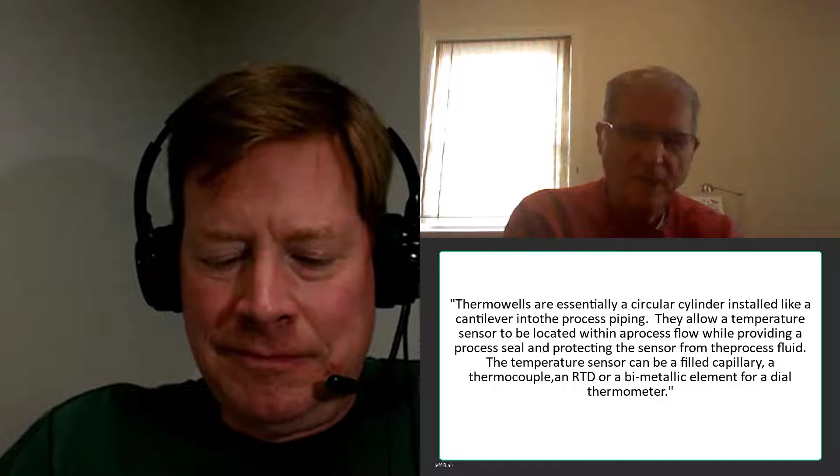So that's kind of where we are. I was able to get a wide breadth of experience in my professional career - I've seen everything from heavy chemicals all the way up to pharmaceuticals, silicon, textiles, the whole bit. In '96, I got a master's degree at Washington University - it took me 5 years of evenings - and that kind of allowed me to get the teaching position and a few things like that. So that's pretty much my professional career. I managed to get elected to ISA Fellow about 10 years ago or so. So that's pretty much where I am.

So you've got some pretty heavy credentials, I'd say, going throughout. I used to travel North America and Canada, and there's quite a few engineers out there that I think you trained, either mentoring at Monsanto or teaching at WashU. Oh, that's interesting - I didn't realize there's a lot of Heider disciples out there.

It's amazing what happens. Well, today we're going to talk about one of the subjects that Bob has tried to impart some of his knowledge and teach me. So, from a simple standpoint, this little piece of metal is what we're going to talk about - they're not always made of metal, but this is a stainless steel thermowell. Normally you'd put an RTD or a thermocouple in here, and then this would insert into the process. This happens to be a threaded thermowell. So Bob, can you tell us a little bit about thermowells and maybe what happens when you don't use them, or thermowells gone bad, I guess you could say?

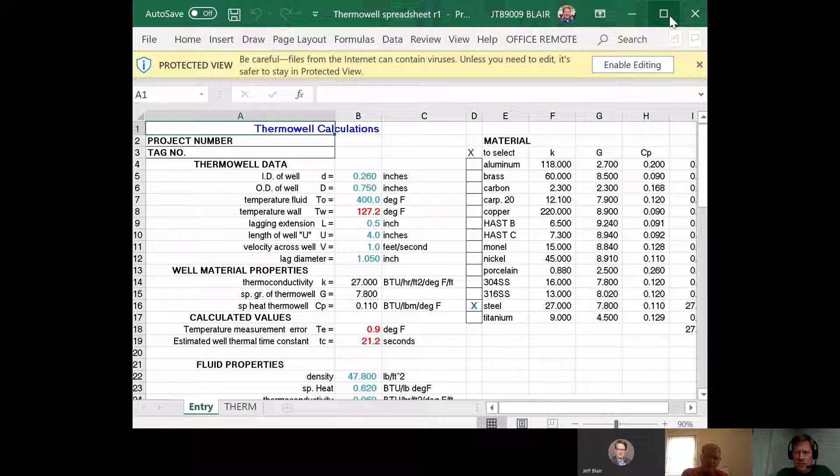Well, one of the interesting aspects of these is the fact that there is an error - there can be an error. In some cases it's very small, but in other cases it can be very severe, depending on how it's installed. And that's because you actually have heat conducting in one direction or the other, depending on whether the process is hotter or colder than the ambient. If you think about your days in high school chemistry, and you had a beaker and you needed to know what the temperature was, you always found that if you stirred it around, you would get a more rapid indication of what the temperature is.

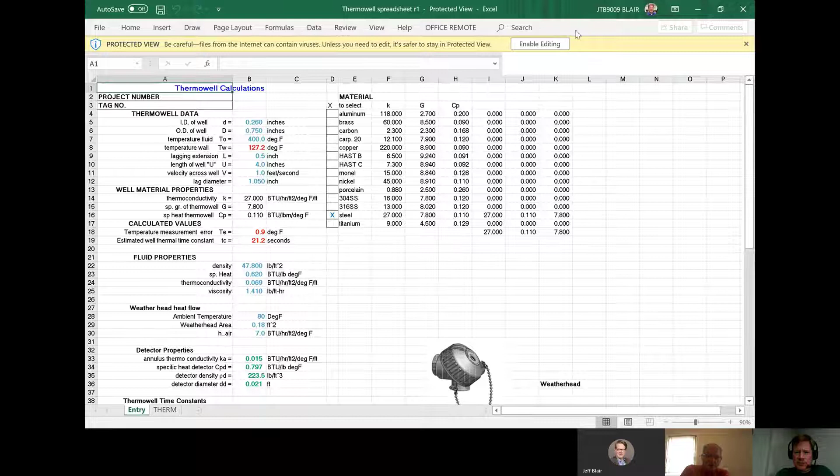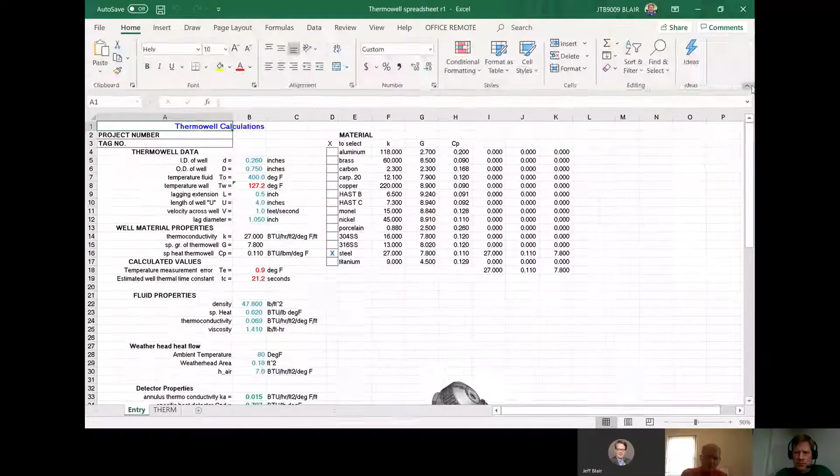So, as a result of a couple of cases where there were some significant errors - or at least I was able to perceive that there were errors in the thermowells - many of these were installed in processes and in locations that were such that I didn't feel we were getting a decent temperature. So I developed this spreadsheet to give people an indication as to what the potential errors were.

The other aspect of this is the dynamic situation. When you have a piece of metal and you have a change in process temperature, it takes a period of time for the element to respond to the process conditions.

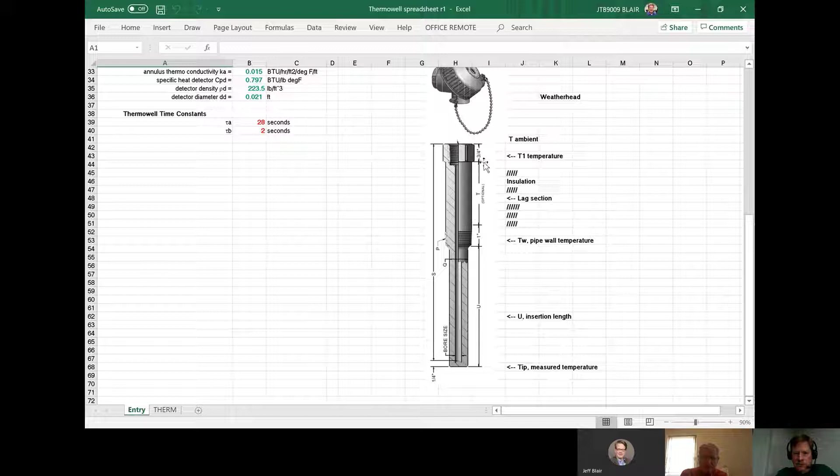So I developed this spreadsheet, and what it does is calculate the tip error. As we move down here, you see there's the insertion length, and then there's a fitting, which can either be screwed or flanged. The part that's immersed in the fluid is usually called the insertion length, and by convention it's called U, the U length.

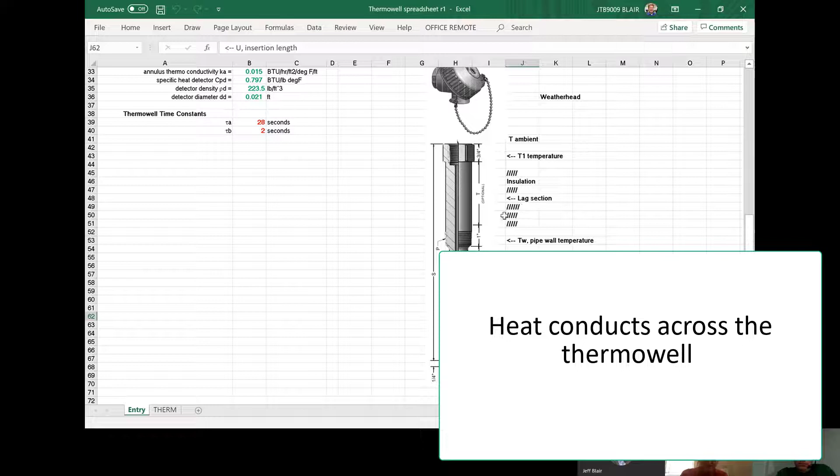In many cases you have insulation that you have to contend with, so there's a section called a lagging section, before you actually get to the connection where the thermocouple or RTD connects to either a transmitter or goes into wire. So basically you have heat conducting across this, from the tip all the way along the whole shank, based on the fact that you have this inserted into the process.

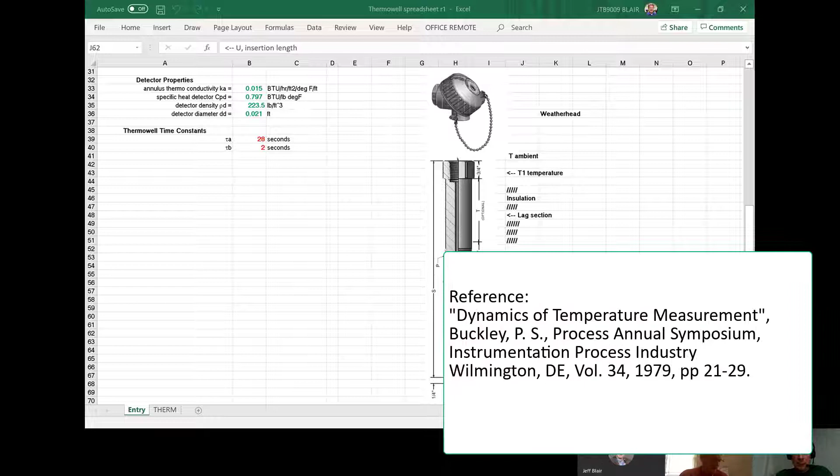Back in 1980, there was a paper given by a fellow named Dan Richmond, who worked at Anheuser-Busch at the time. This ISA paper discusses this error and shows you how to calculate it. So what this spreadsheet does is actually calculate that error.

And the dynamics are based on another paper, by a gentleman called Buckley. I can't recall exactly when this was written, but it's referenced quite a bit in terms of the dynamics of the well.

So that's the background of this, and basically it's a spreadsheet that lets the user calculate what this error is. In some cases, particularly where you have a stubby well, which now, as a result of the new ASME vibration standard, the user often has to use a shorter well, they could potentially get some errors in measurement. That's what I'm trying to call people's attention to here.

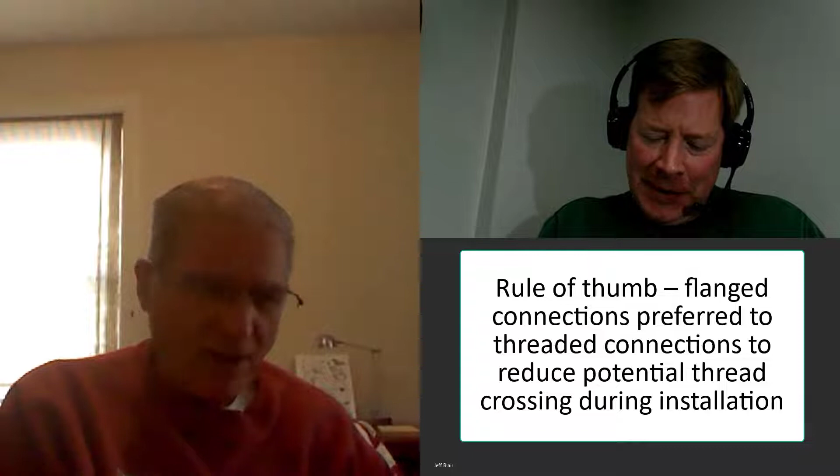But no, I don't do that calculation in this spreadsheet. I decided it's best, there's enough in there as it is now anyway, just being able to calculate the error and the thermal time constant.

So in your years of experience, were there any rules of thumb, golden rules regarding thermowells, such as they had to be so long or welded or threaded or a certain type of material?

Yeah, basically, in the first place, as far as the insertion length goes, it's usually a good rule of thumb that around 6 to 7 diameters of insertion length is a good rule of thumb for insertion.

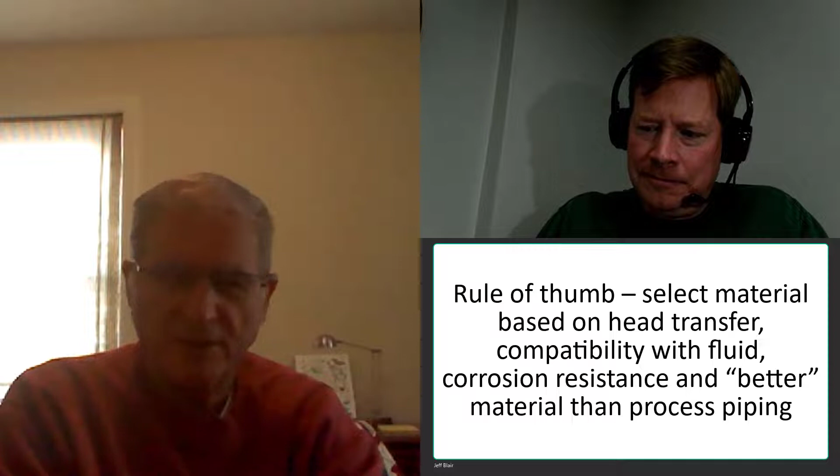As far as the connections go, because of flammables and this kind of thing, you obviously want a flanged connection. I would never use a screwed connection on any process. It's just my personal preference. Any process connection should be flanged, not screwed, because if you cross the threads, you've got a real problem, and if you have a threadolet welded in, you'll have to cut it out, and that's extra expense. With a flange, it's just two flat surfaces bolted together, and if you happen to cross one of the bolt threads, you throw it out and do another one. So I have a firm belief that one should use flanged connections for any process fluid.

That's just my thought. So those are two of the rules of thumb that go along with it. There's a lot of discussion about RTDs versus thermocouples. I don't think we'll get into that today, but there's some opinions on that. At any rate, as far as the material and construction of the well goes...

You need to think about good heat transfer as well as process corrosion considerations. Generally, we like to make the well a little bit better material of construction than the process piping spec. So if the process piping spec was carbon steel, we usually go with something like 304 stainless.

So we don't call you the fixer for nothing, Bob. I'm curious if you went to any job sites where you got called out, and maybe you showed up and they had either the wrong type of thermowell, or threaded thermowells in the process instead of flanged or welded connections. Did you ever get to chew anybody out and tell them to rip out that thermal well and put in the right thing?

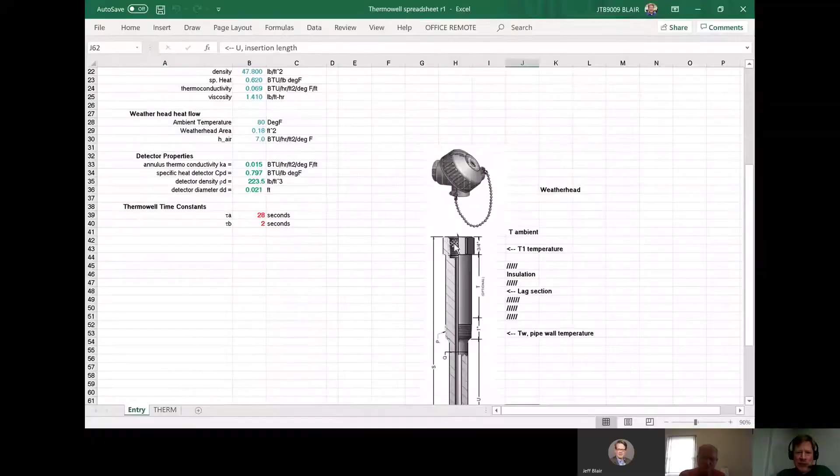Okay, so you open up this spreadsheet, and the first thing you see is a series of columns here that has either light blue or green entries, and this is where the user has to put in the data for the thermowell. The red cells are calculated cells.

You'll notice that to the right of this there's a material table, and this is a lookup. So basically, depending upon the material of construction, you put an X in the box next to whichever one you want. A capital X, by the way, it has to be a capital X. And if you want to void out another entry, you have to put in a space. So it's essentially how the lookup table works.

That then will actually bring that data into the well materials of construction. So you have the well dimensions and material of construction. The next thing you need is the fluid properties: the density, specific heat, thermal conductivity, and viscosity. Those get entered in.

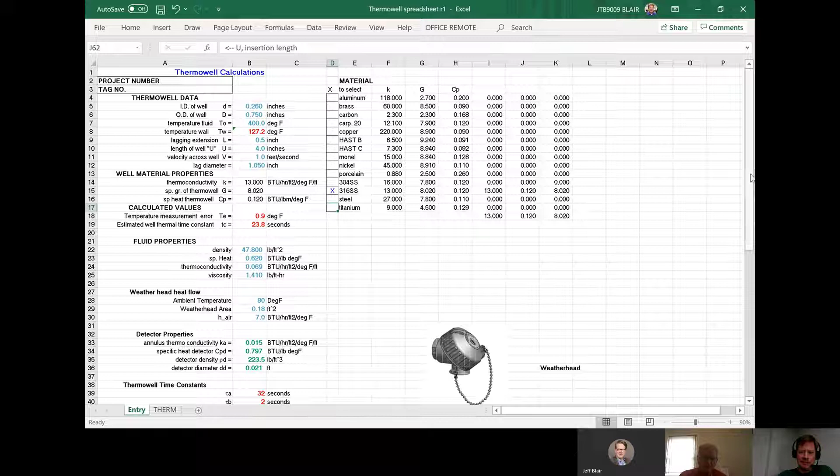The other aspect is, since we're actually calculating how much heat is being lost through the well, we need to know how much is lost through the weatherhead. So you take an estimate, put in the ambient temperature, and estimate the area of the weatherhead, or it could be a transmitter, whatever, you put that in square feet. And then essentially estimate the heat transfer to the air. I use 7 BTU units here, which is a reasonable one for heat transfer just to the ambient air.

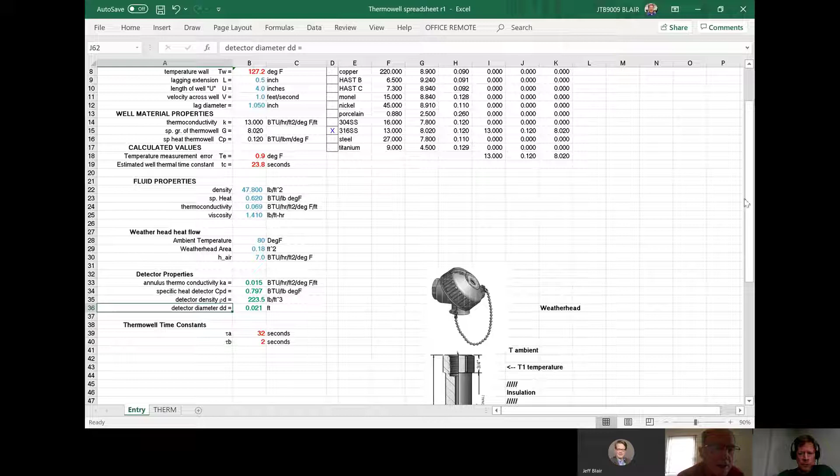The next information that's put in is information about the detector. There's the annulus thermal conductivity, the specific heat of the detector, the density - in this case it's magnesium oxide - and the detector diameter, which is in feet.

Okay, so once you enter all that information in, the thermal time constant is calculated. You don't have to use the solver for that. Those numbers are actually calculated based on Buckley's paper.

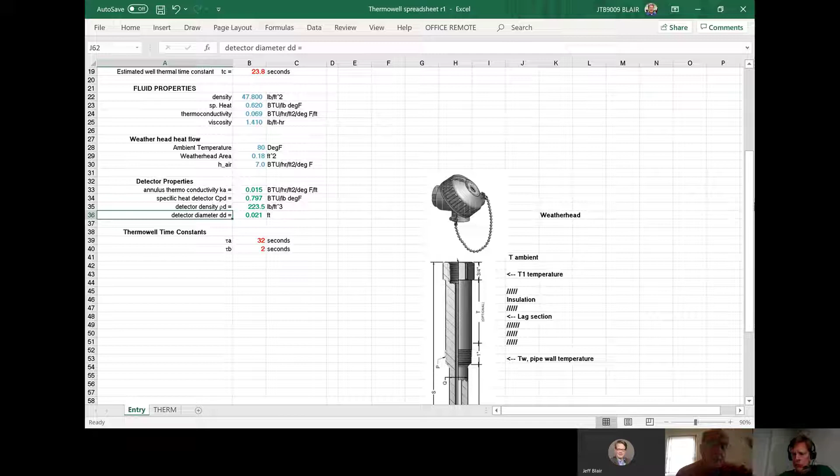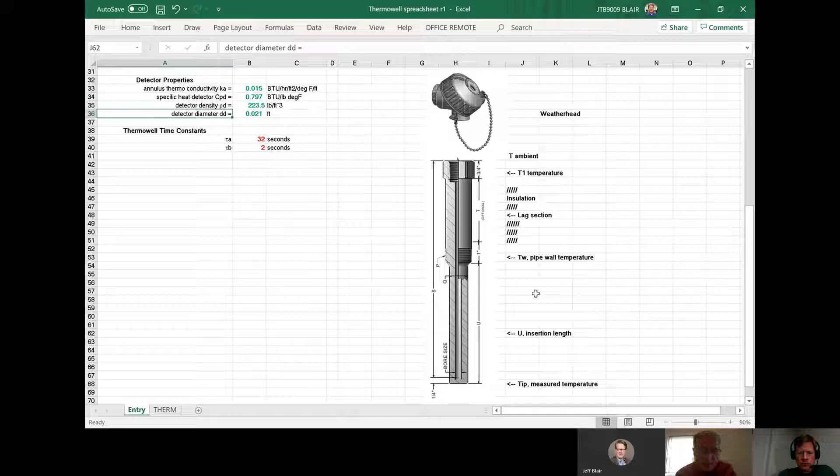Now, I did modify the fact that the newer wells are spring-loaded, so I assume that the user has a well with a spring-loaded element in it. And the bottom of these wells now is gun drilled, and there's a V or a W, if you will, at the bottom of the well. So there's very good connection between the element and the bottom of the well. That used to not be the case.

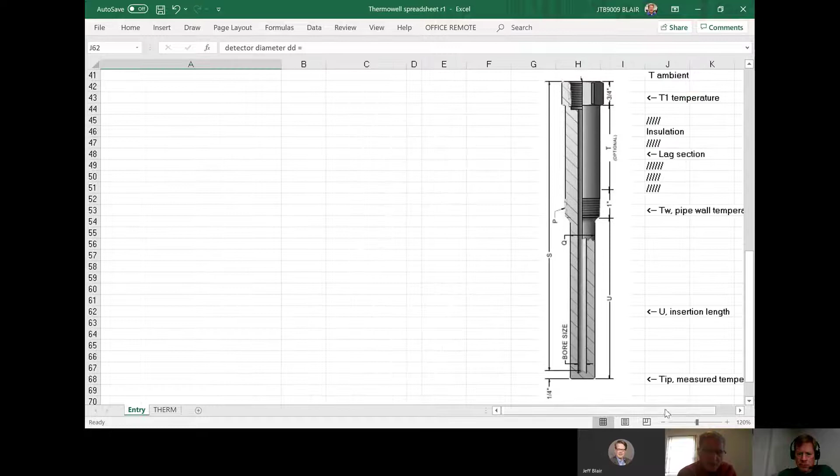In days of old, we made our own thermowells, and we actually made our own thermocouples. We had to put a little motor oil in the bottom of the well to assure good heat transfer. But in today's day and age, with the newer wells, I've had good luck with the elements just being spring-loaded to the bottom. It makes it fairly receptive.

So once all that is entered in, to get the tip error you have to use a solver. The solver is on another tab in the spreadsheet. Let's go back.

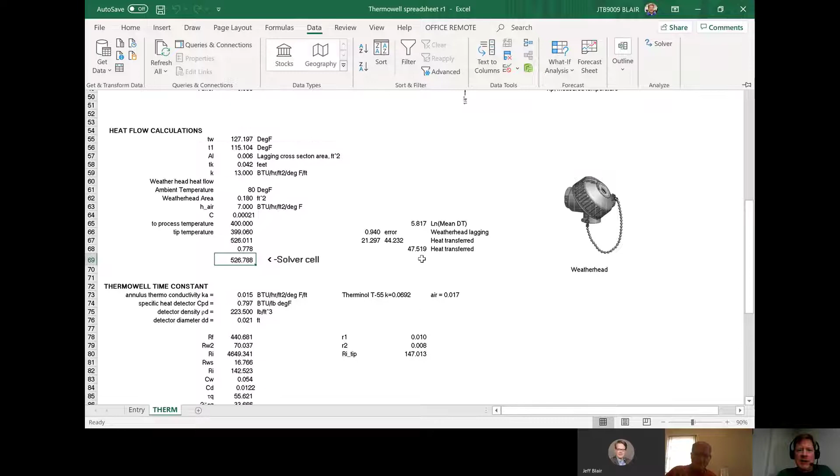Okay, so we're back to the spreadsheet. So when we've got the entry, we put all our data in there, and then we go to Therm, and we see we've got these heat flow calculations in a solver cell. Yeah, so that needs to be 0, to balance all the heat.

So to do that, you go to Data and then Solver. Data, yeah, Solver, and then we hit Solve.

This is new for me. So what can you walk us through? Yeah, then it goes through and it just tells you to keep the solution. You saw that it goes to 0, so then you hit OK.

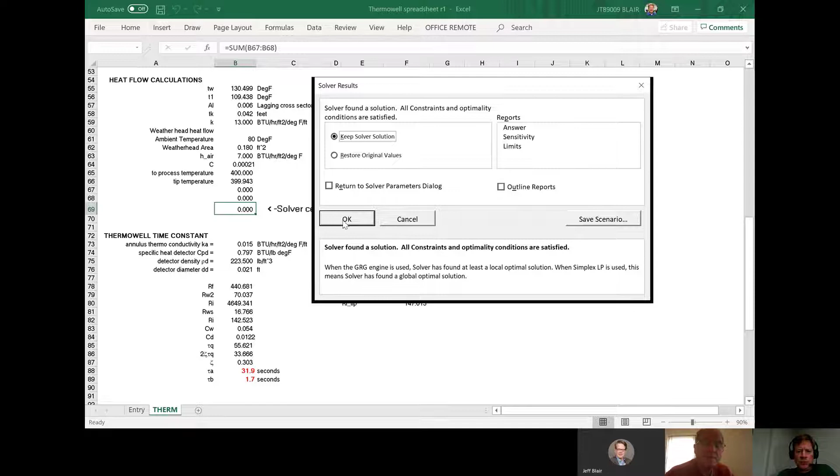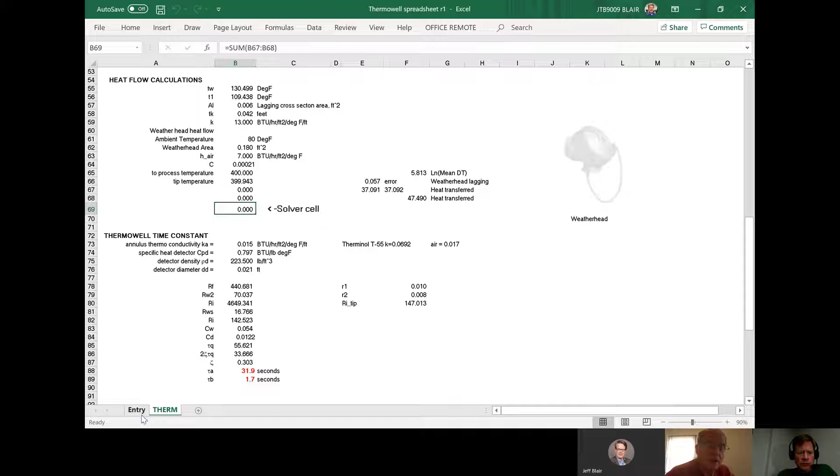Okay, keep solver solution, answer sensitivity limits. Okay. And then if you go back to entry, you'll see what the error is, up at the top part of the cell. So in this case, it's 1/10 of a degree.

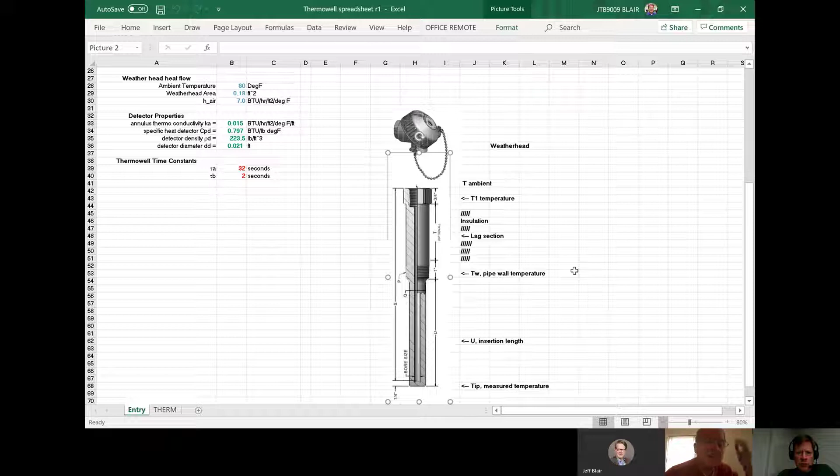So what we can do to show how this works - this is what we're looking at right here, Bob, 1/10 of a degree, that's the Fahrenheit error. So let's go ahead and make a case of making it out of copper instead of stainless, just to show that it does work. So hit an X, a capital X there, in copper.

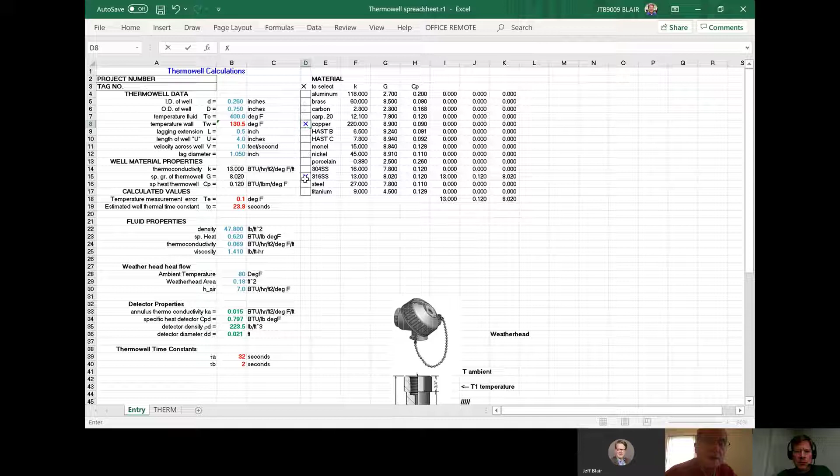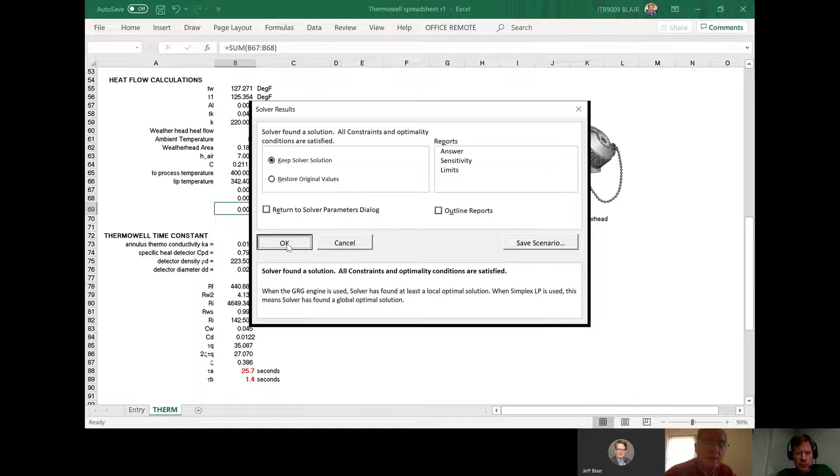Okay, keep that solution, hit OK there, then go back to the entry. Oh, quite a much bigger error. Yeah, you'll see that was a pretty extreme case, but it does show that the spreadsheet does do what it's supposedly advertised to do. So that's pretty much what was put in with this.

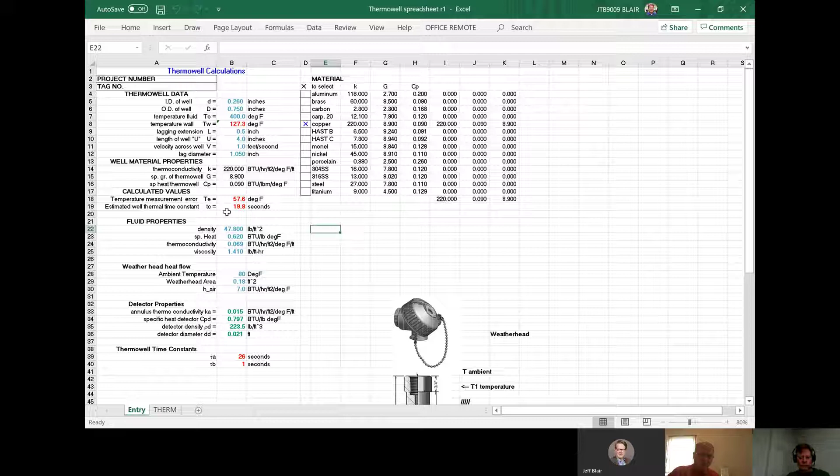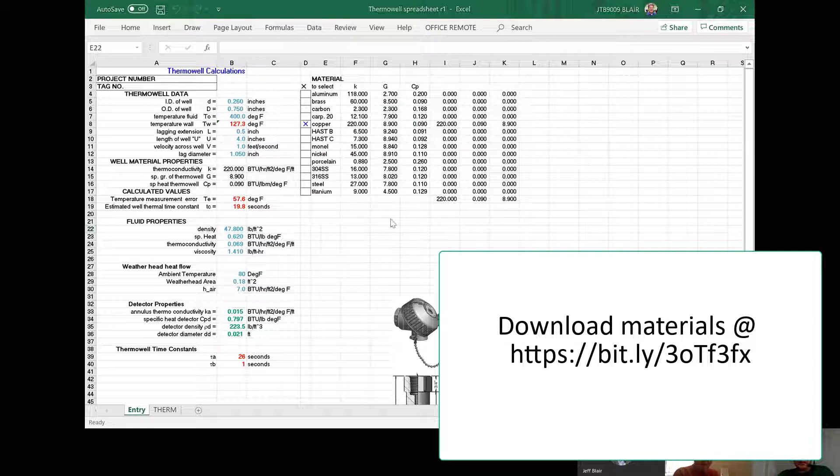I do have another spreadsheet that, this is for a flowing well. I do have another spreadsheet that's based on the fact that a well is in a stagnant solution. That one requires a calculation or understanding of what the fluid buoyancy is, which has to do with what effects you have in terms of heat transfer across a liquid that's buoyant because of temperature change.

So that one is a little more involved, but you can actually calculate the error and the time constant in that case. Just as a side note, that was one of my experiments that I had the students do in my lab. I actually had a thermowell, and I had them go through and calculate the heat transfer, and then also calculate the time constants. And then they would actually store the data and get it into Excel, and then calculate and measure the time constant.

So that was a good exercise in, actually it was more an exercise in transport phenomena than it really was process control.

But the one thing that you need to think about with this is that in many cases, the thermowell is the biggest lag in the temperature control loop. If you take a steam heat exchanger as an example, and you're heating some fluid, and you have a thermowell downstream a bit, the chances are, when you go through and analyze this, the thermowell will be the largest lag in the system.

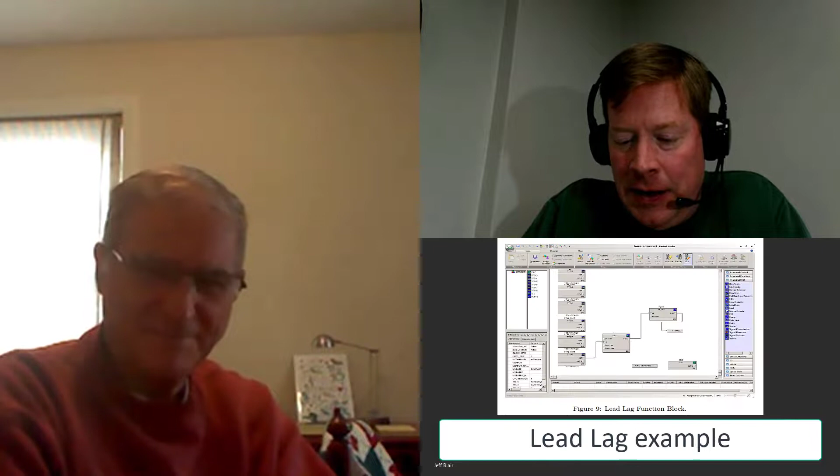But this has been really interesting, Bob. Anything else? Well, that's about all I can think of. If I think of something else - the problem I have is occasionally I'll wake up at 2 o'clock in the morning and say, 'Oh my gosh, I should have written that up,' or 'I forgot about this case.'

One thing about the dynamics that can be improved - I have that in the write-up on the spreadsheet. One of the things you can do with newer DCS systems is what's called a lead-lag block. Basically, you have this thermowell lag time, and if you put a lead-lag block in after bringing the input into the DCS system, with the lead equal to the lag, or slightly greater or less than, this will improve the response.

You'll have to have a lag time, and the general number I saw was 40%. This appeared referenced in a text for an old pneumatic system made by Taylor Instruments. They had what they called a thermowell compensator, which was actually a lead-lag device you'd screw in to get this to respond, accounting for the effect of the lag in the thermowell. My guess is that was probably pretty hard to maintain being pneumatic.